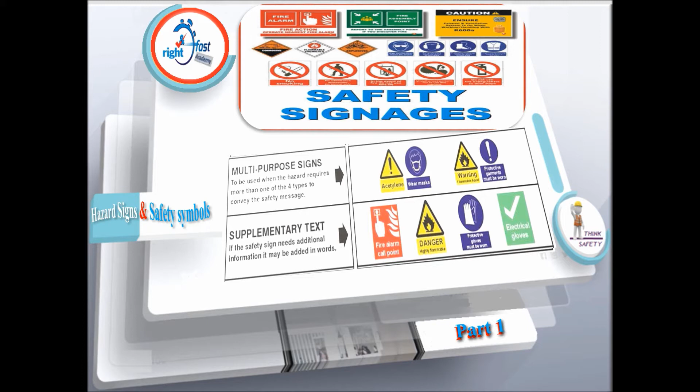Works traffic signs are the same design as public road signs. Multi-purpose signs are to be used when the hazard requires more than one of the four types to convey the safety message. Supplementary text: if the safety sign needs additional information, it may be added in words.

Electricity. What is electricity? Electricity is the flow of energy from one place to another in a closed circuit. Uses of electricity in our daily life: electricity around us operates lights, communication, power tools, transportation, and home electrical appliances. Electricity is a form of energy that can give things the ability to move and work.

Electricity hazards: electrical shock, arcing, fire and explosion, burns.

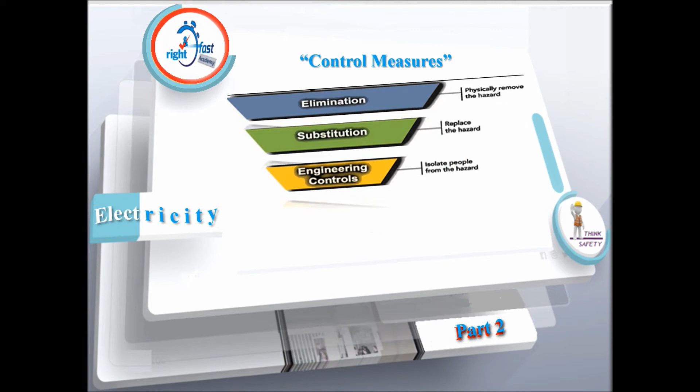Control measures: elimination, substitution, engineering, administrative, and personal protective equipment.

Elimination is the process of removing the hazard from the workplace. It's the most effective way to control a risk because the hazard is no longer present. It's the preferred way to control a hazard and should be used whenever possible.

Substitution occurs when a new method or equipment that is less hazardous is used instead of another equipment that causes a hazard. The goal is to choose new equipment that is less hazardous than the original.

Engineering controls are methods that are built into the design of a plant, equipment, or process to minimize the hazard. Engineering controls are a very reliable way to control worker exposures as long as the controls are designed, used, and maintained properly. The basic types of engineering controls are process control and isolation from source.

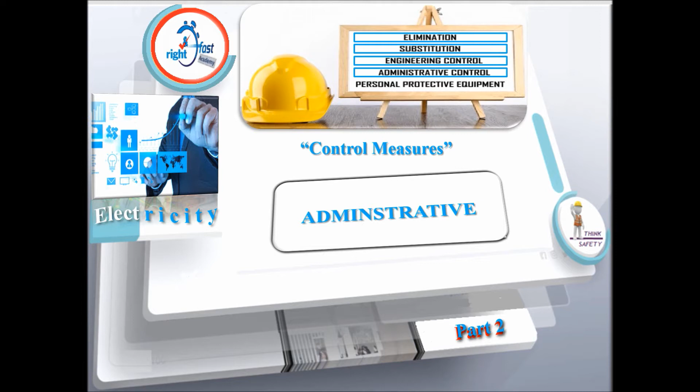Administrative controls limit workers' exposure to hazards by providing safe work areas or by implementing other rules. Examples: restricting access to a work area, restricting the task to only qualified workers, scheduling maintenance and exposure to hazards for times when few workers are present, using job rotation schedules, and using a work-rest schedule that limits the length of time a worker is exposed to a hazard.

Personal protective equipment (PPE) includes items such as respirators, protective clothing such as gloves, face shields, eye protection, and footwear that serve to provide a barrier between the wearer and exposure to hazards.

Electric power tools allow you to do every job quicker than ever before. Projects that took days can now be accomplished in a matter of hours with the use of high power tools such as electric saws or drills. It's important that any power tools are fit for purpose and safe to use for the task they are designed for.

Power tools hazards and precautions: checks and inspection for damage or faults should be carried out pre-start before using any type of electrical power tools. Employees using power tools must wear safety glasses with side shields and additional PPE.

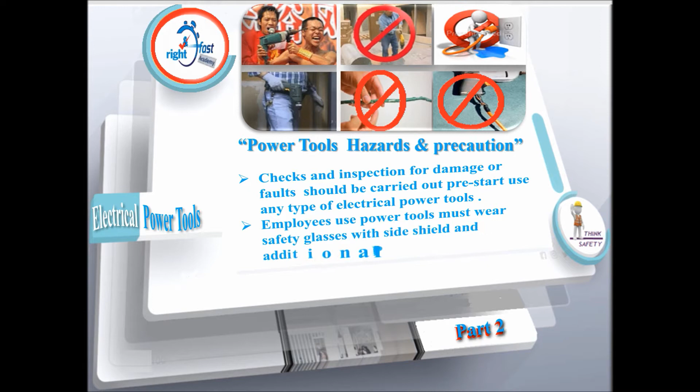Never use electrical power tools around water or other unsafe conditions. Don't use electrical power tools in wet places or touch them with wet hands. Avoid carrying power tools with a finger on the switch or by the cord. Do not point the portable electrical power tool at anyone. Do not use in explosive or flammable areas, nor leave portable electrical power tools unattended.

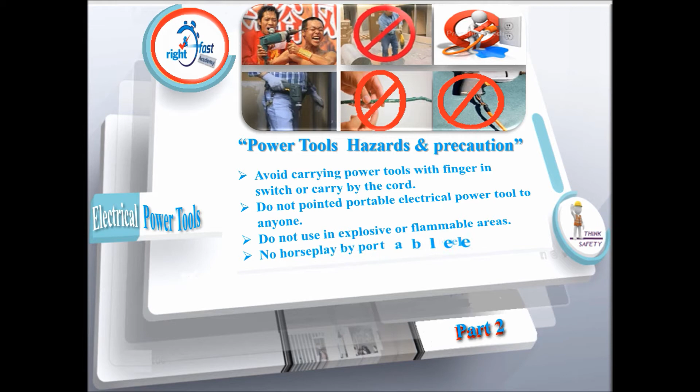Confined space: once a person puts his full body, upper body, or even his head in, it is considered entry to the confined space. Confined spaces are characterized by three criteria.

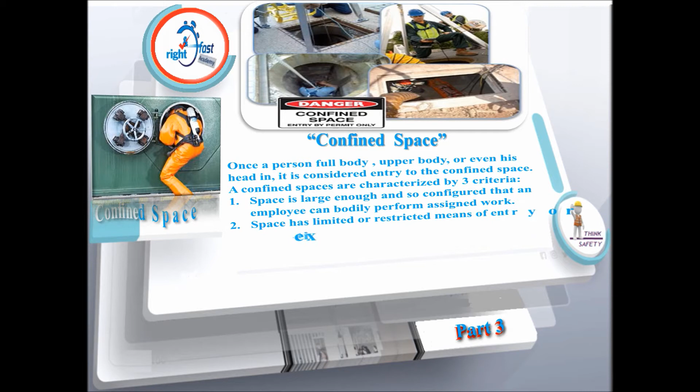The space is large enough and so configured that an employee can bodily perform assigned work. The space has limited or restricted means of entry or exit. The confined space is not designed for continuous employee occupancy.

Any of the following factors indicate that a workspace has a limited or restricted means of exit: the need to use a ladder or movable stairs, or stairs that are narrow or twisted; a door that is difficult to open or a doorway too small to exit while walking upright; obstructions such as pipes, conduits, or materials that a worker would need to crawl over or under or squeeze around; and the need to travel a long distance to a point of safety.

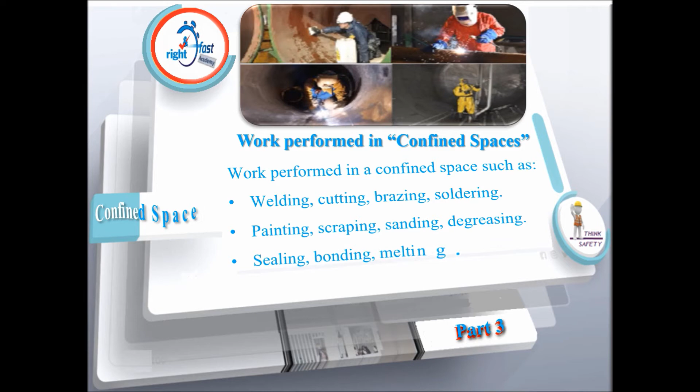Work performed in confined spaces includes welding, cutting, brazing, soldering, painting, scraping, sanding, degreasing, sealing, bonding, and melting. Potential hazards include atmospheric hazards, mechanical and electrical hazards, physical hazards, and environmental hazards such as water, sand, rain, or sludge.

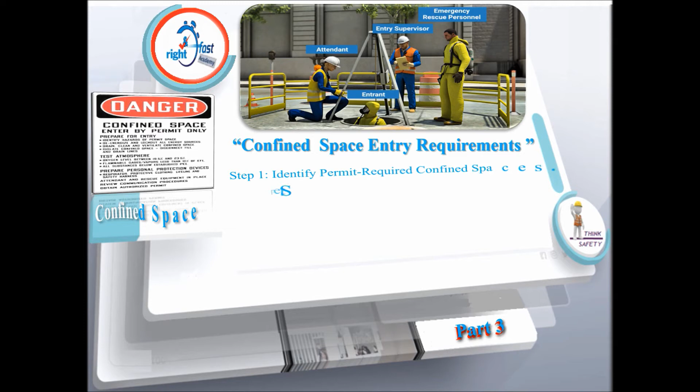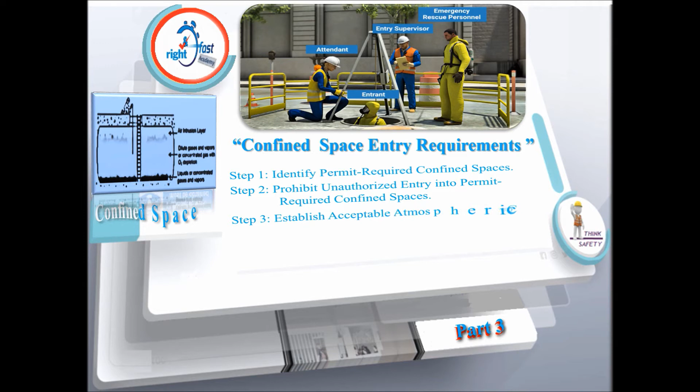Confined space entry requirements. Step 1: Identify permit-required confined spaces. Step 2: Prohibit unauthorized entry into permit-required confined spaces. Step 3: Establish acceptable atmospheric conditions. Step 4: Establish atmospheric testing criteria. Step 5: Use engineering controls for atmospheric hazards.

Step 6: Establish control methods for physical hazards. Step 7: Establish safe entry and exit procedures. Step 8: Provide PPE and safety equipment. Step 9: Provide rescue and emergency response. Step 10: Conduct training and instruction.

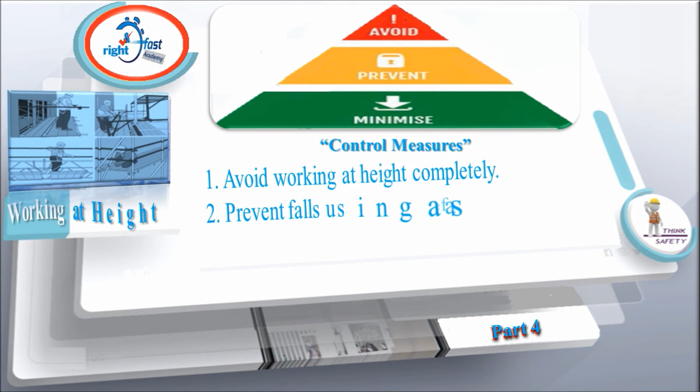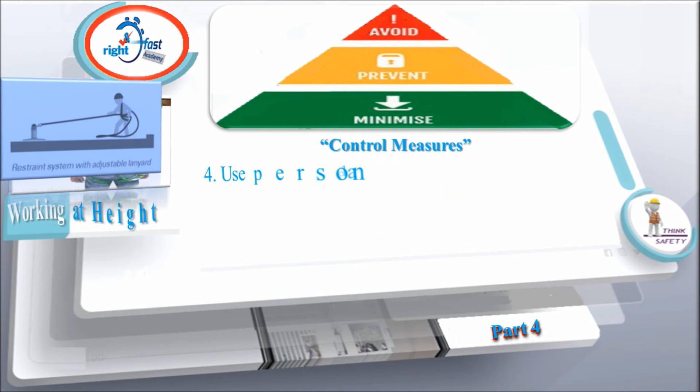Control measures: assess the risks of working at height and take the necessary measures to avoid accidents by following these steps: 1. Avoid working at height completely. 2. Prevent falls using a safe place to carry out work. 3. Prevent falls using collective equipment. 4. Use personal protective equipment (PPE) for restraint.

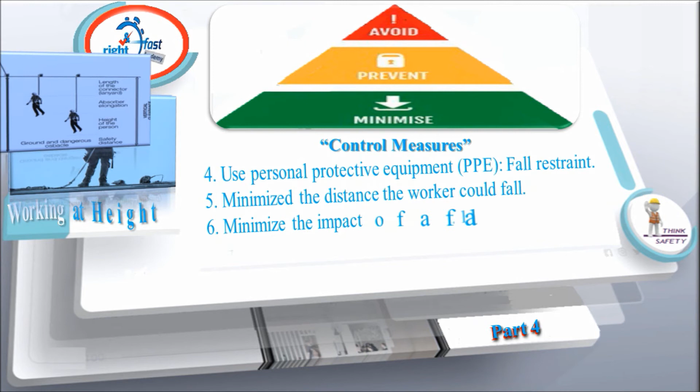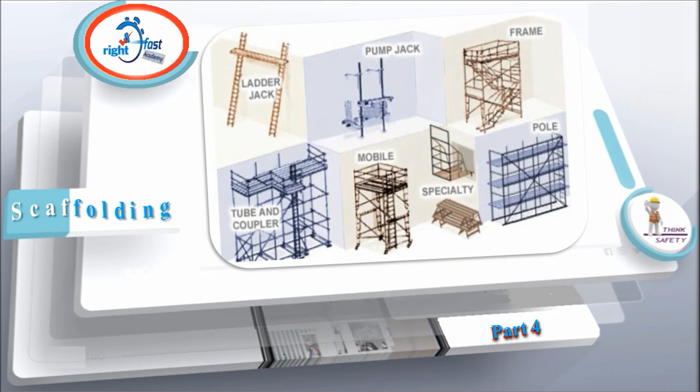5. Minimize the distance the worker could fall. 6. Minimize the impact of a fall. 7. Minimize risk by undergoing training. Scaffolding is a temporary structure raised on wooden or metal columns or other materials. It's used to assist in the construction, maintenance, and restoration of buildings and bridges.

In another way, scaffolding is used to carry workers working in a high position, along with equipment and materials used for work.

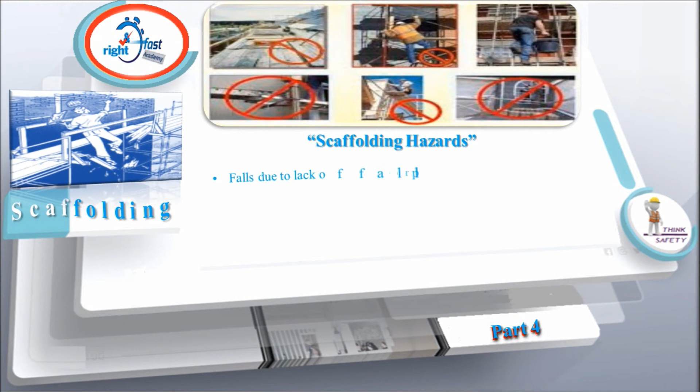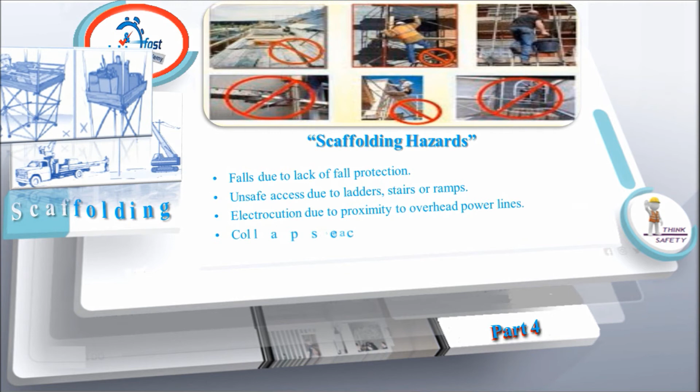Scaffolding hazards include falls due to lack of fall protection, unsafe access due to ladders, stairs, or ramps, electrocution due to proximity to overhead power lines, collapse caused by instability or overloading, and injury from falling tools, work materials, or debris.

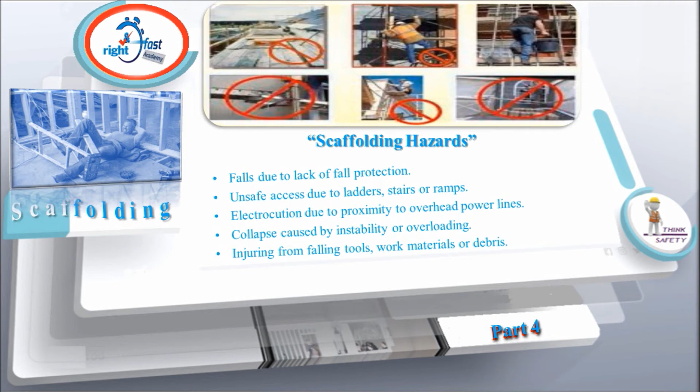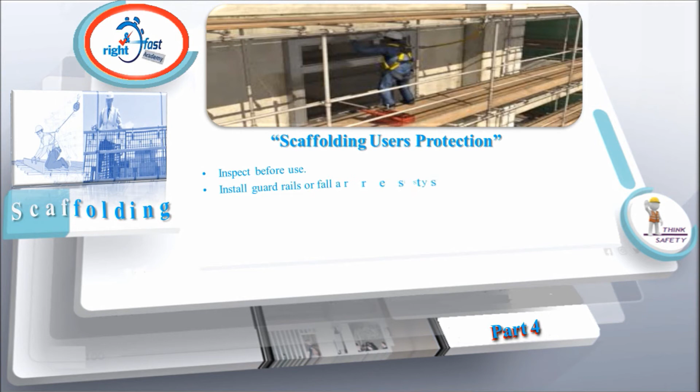Scaffolding user protection: inspect before use, install guardrails or a fall arrest system beyond 10 feet, secure open sides and ends of platform edges, never climb cross bracing to access the platform, and never move a scaffold containing workers or materials. Stick to these rules to reduce falls.

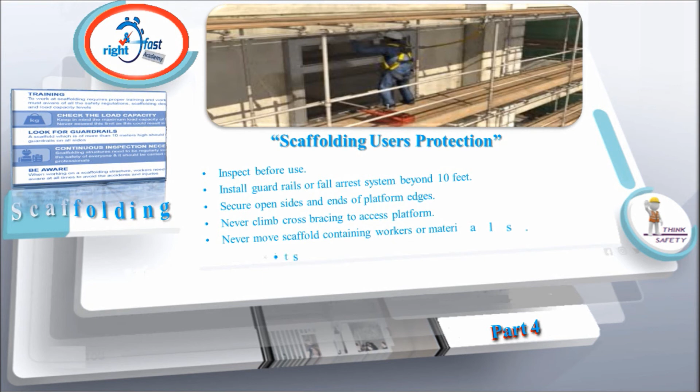Excavation and trenching were going on all around us, needed for installation or repair of utility lines, replacement of water and sewer lines, and even grave digging.

Excavation is any man-made cut, cavity, trench, or depression in an earth surface formed by earth removal. A trench is a narrow underground excavation that is deeper than it is wide, and no wider than 15 feet.

Notice, all trenches are excavations, but not all excavations are trenches. Trenches are usually more dangerous.

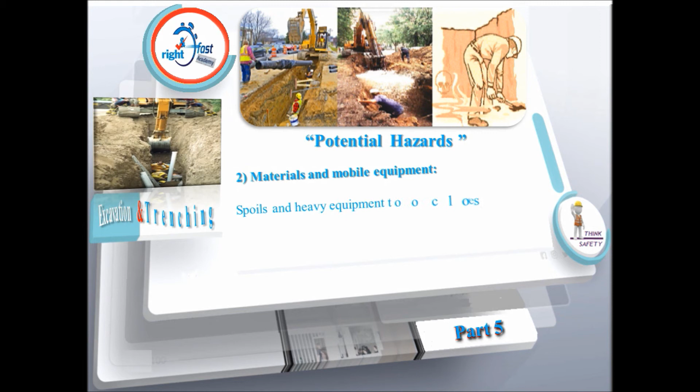Potential hazards: first, inadequate protection systems, such as inadequate sloping or shoring, lack of shoring knowledge, and poor maintenance of shoring or defective shoring materials. Second, materials and mobile equipment—spoils and heavy equipment too close to the edge of an excavation can cause a cave-in.

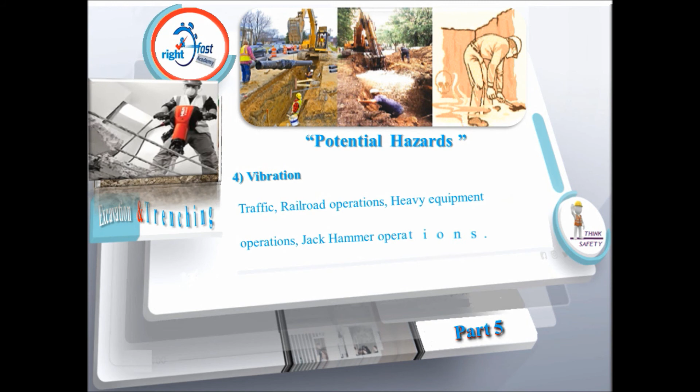Third, water accumulation, such as saturation, hydrostatic pressure, or frost action. Fourth, vibration, such as from traffic, railroad operations, heavy equipment operations, or jackhammer operations. Fifth, hazardous atmospheres, such as near landfills, sites contaminated by leaking gas lines or storage tanks, or water accumulation in sewers.

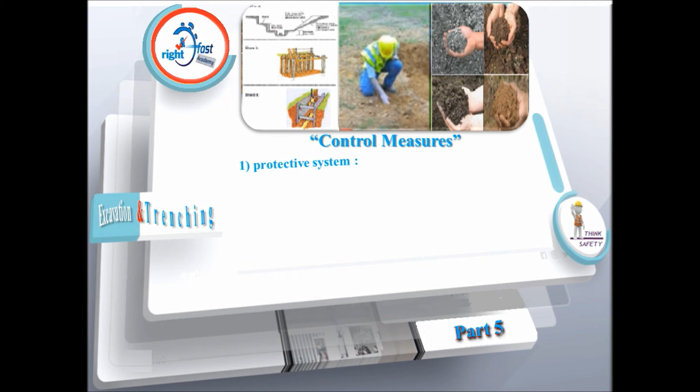Control measures: first, protective systems—sloping or benching of the site, or supporting the sides with a shoring or shielding system. These methods are designed to protect workers from the risk of collapse by forming a stable side from top to the bottom of the trench, depending on soil type.

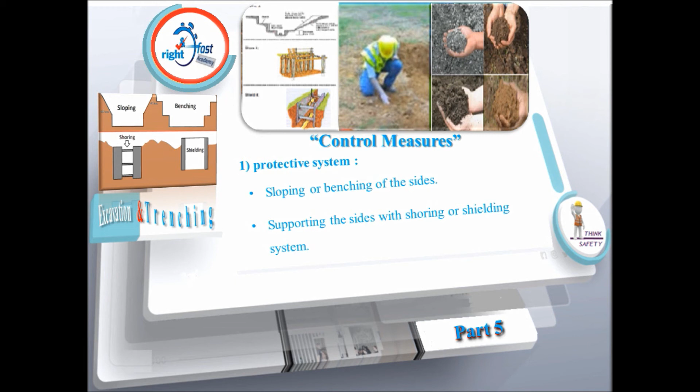Second, the competent person. The protection system is designed, selected, set up, and monitored by a professional called a competent person—someone with professional training, knowledge of soil analysis, testing and classifying, and the use of protective systems. They must be able to predict circumstances that could lead to breakdown or failure of the protective system and dangerous atmospheres, and have the ability to take corrective action to reduce risk or stop work when needed.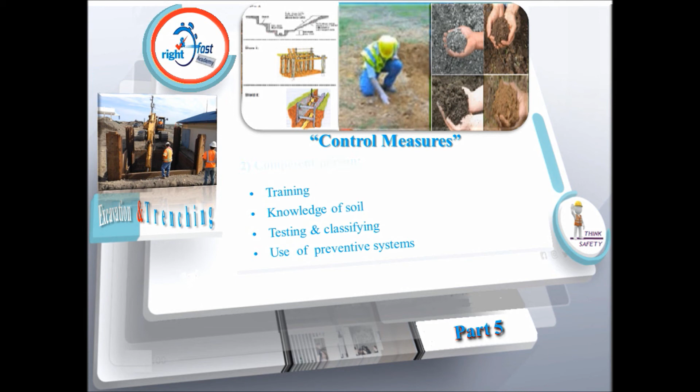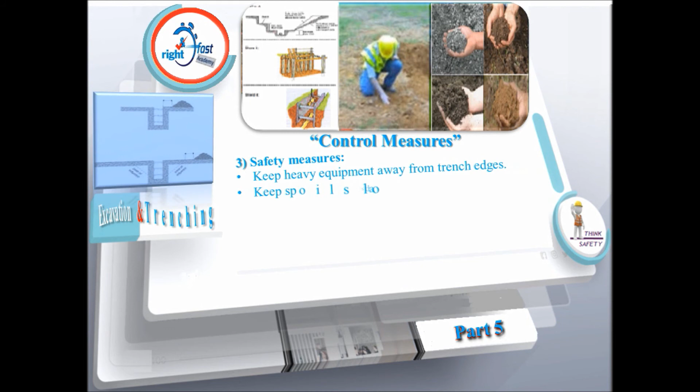Third, safety measures: keep heavy equipment away from excavation or trench edges, keep spoil loads at least 2 feet from excavation or trench edges, know where underground utilities are located, and test for low oxygen, hazardous fumes, and toxic gases.

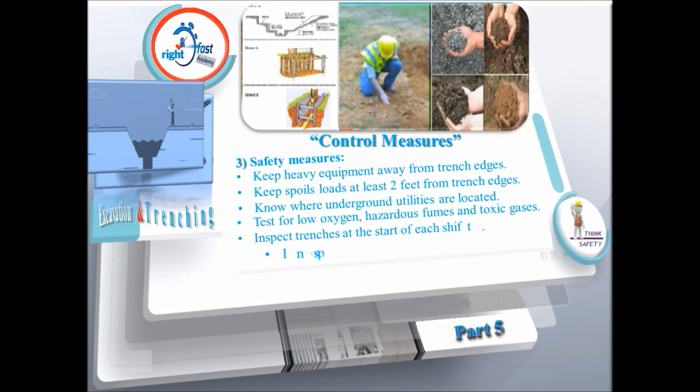Inspect trenches at the start of each shift, and inspect trenches following a rainstorm. Don't work under a raised load.

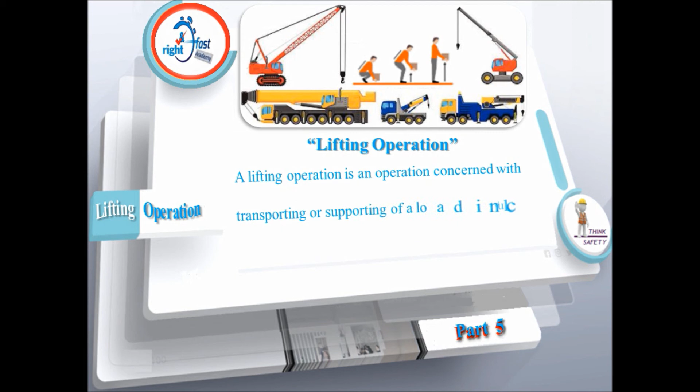A lifting operation is an operation concerned with transporting or supporting a load, including lifting, putting down, pushing, pulling, carrying, or moving.

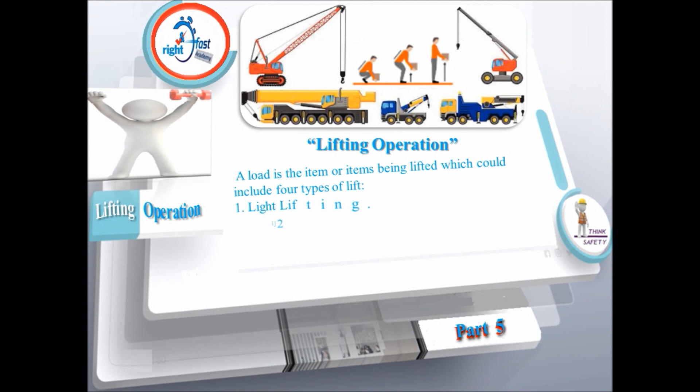A load is the item or items being lifted, which could include four types of lift: light lifting, heavy lifting, critical lifting—lifting by mechanical equipment—and tandem lifting, which is lifting by two cranes or more.

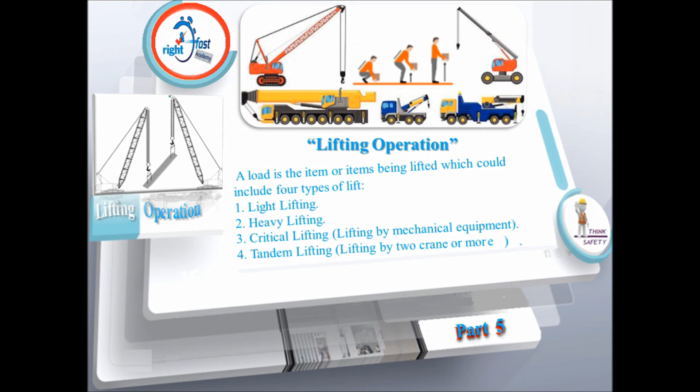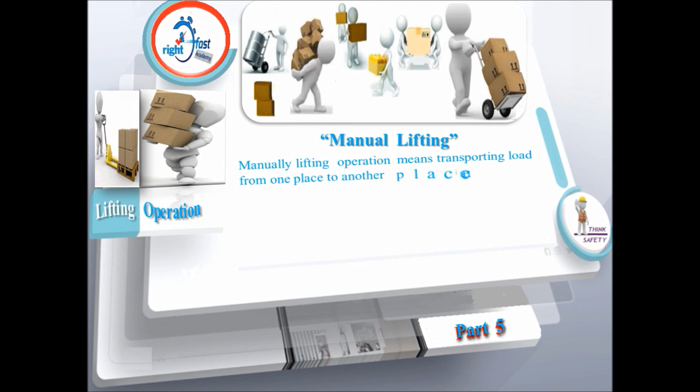A lifting operation may be performed manually or using lifting equipment. Manual lifting means transporting a load from one place to another using bodily force. Manual lifting causes over a third of all workplace injuries.

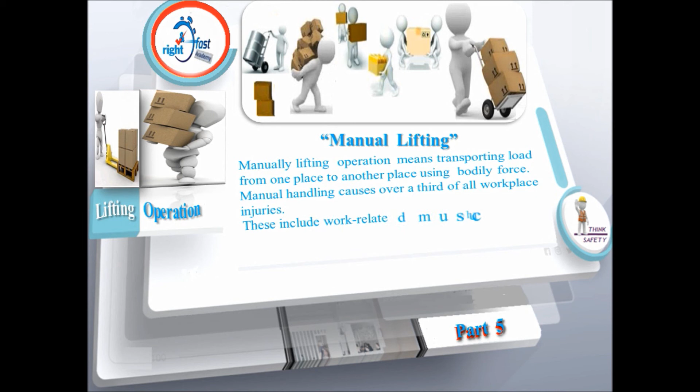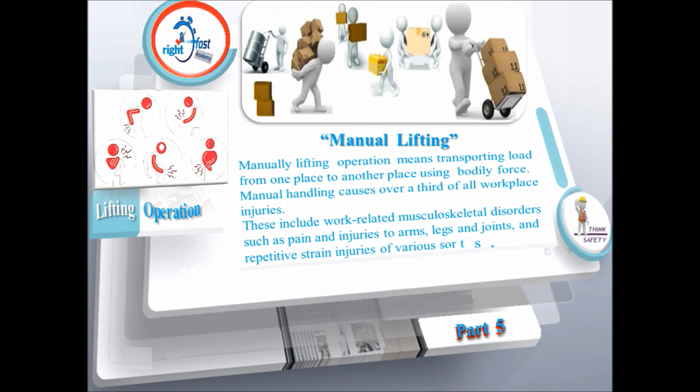These include work-related musculoskeletal disorders such as pain and injuries to arms, legs, and joints, and repetitive strain injuries of various sorts. Here are the do's and don'ts of lifting.

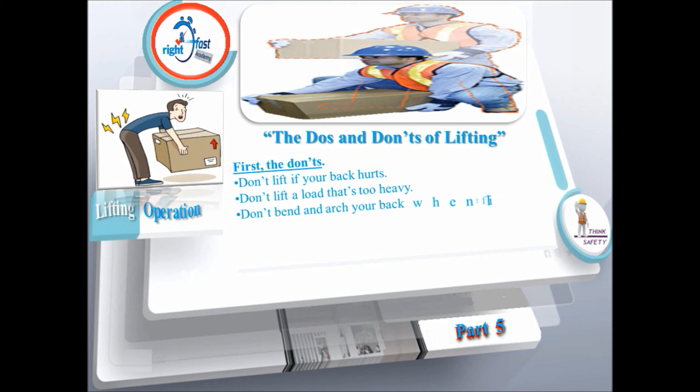First, the don'ts: don't lift if your back hurts, don't lift a load that's too heavy, don't bend and arch your back when lifting or carrying anything, don't twist your spine when holding an object, and don't lift heavy objects over your head.

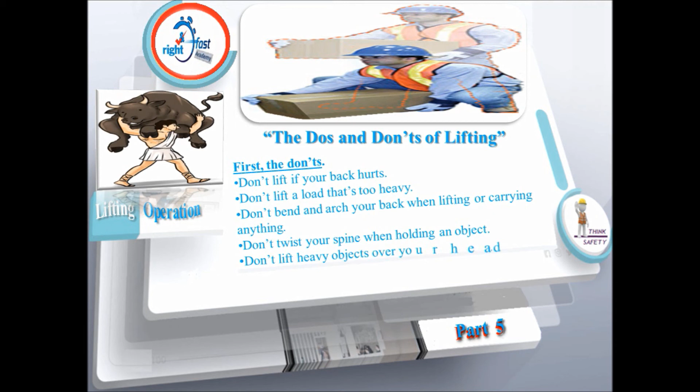When someone says lifting equipment, you may be picturing a crawler crane, mobile crane, tower crane, lifting trucks, or forklifts. However, the definition of lifting equipment is actually anything whose primary function is to lift or lower a load, including any accessories used in doing so.

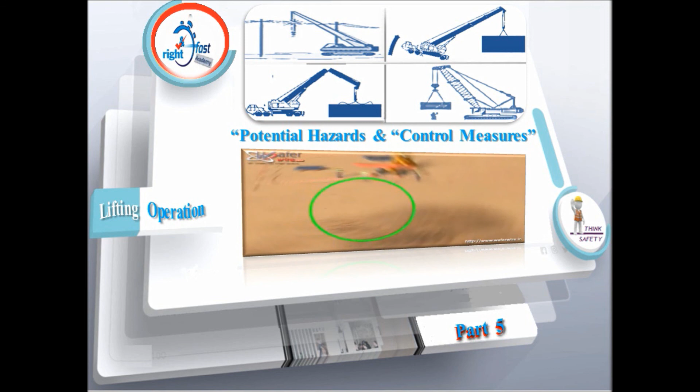Personal protective equipment, or PPE, is incredibly important because it provides a last line of defense against injury, and it can save your life—but only if you use it.

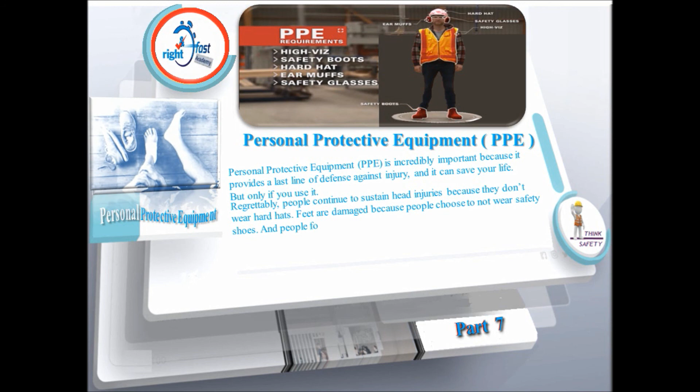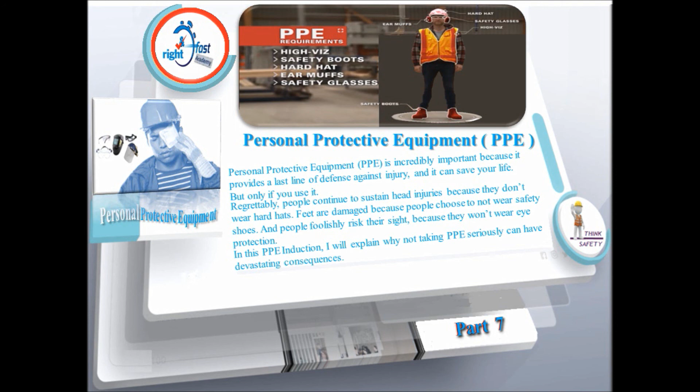Regrettably, people continue to sustain head injuries because they don't wear hard hats. Feet are damaged because people choose not to wear safety shoes, and people foolishly risk their sight because they won't wear eye protection. In this PPE induction, I'll explain why not taking PPE seriously can have devastating consequences.

PPE is equipment that will protect you from job-related injuries, illnesses, and fatalities. At the workplace, PPE includes items like hi-vis, safety boots, hard hats, ear muffs, and safety glasses.

If we ask why people choose not to wear PPE, for some it's uncomfortable to wear. Some people don't see the need to wear it, especially for quick jobs. And most especially, some people put their life in danger because they think wearing PPE makes them look silly. Injuries can result in permanent disabilities, blindness, or even death.

So whatever the reason, there is no excuse for not wearing PPE.